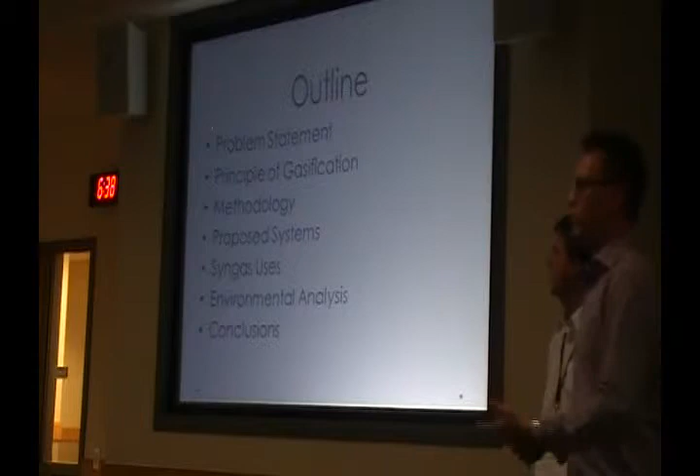What we're going to be discussing today: we're going to go over the problem statement, principles of gasification, the methodology that we used for the analysis, proposed systems for gasification that we analyzed for this project, the uses that we found for SynGas (that's synthesis gas, which is a result of gasification), an environmental analysis, and finally conclusions.

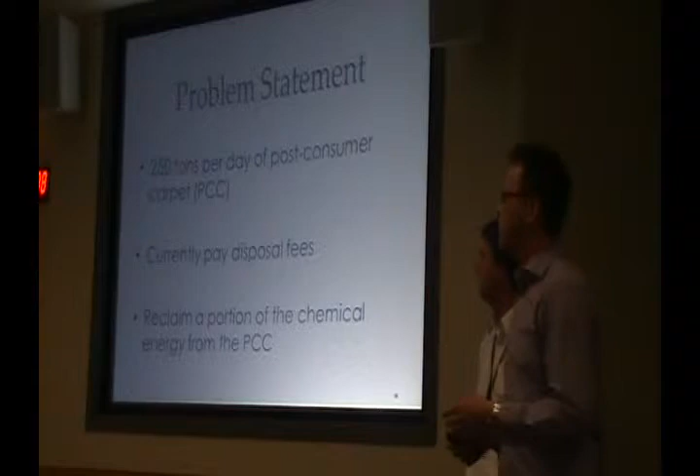So the problem statement is that we have about 250 tons per day of post-consumer carpet waste. Currently, disposal fees have to be paid for this. So we would like to reclaim a portion of the chemical energy that is contained in this carpet.

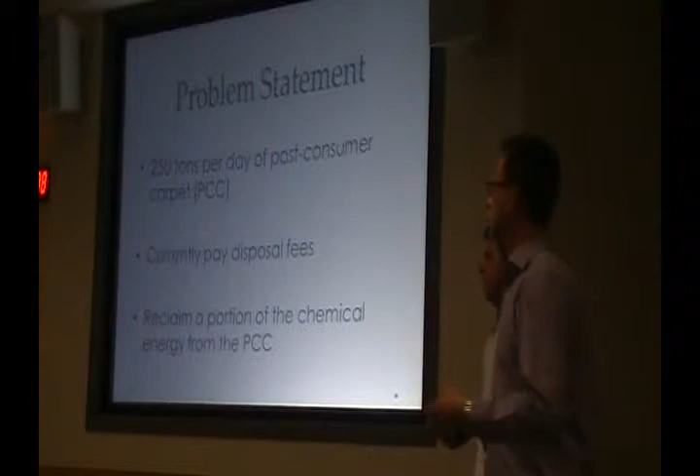Post-consumer carpet has a lower heating value of around 9,000 BTUs per pound. To put that into perspective, middle grade coal has a lower heating value of around 11,000 and natural gas around 20,000. The gasification process of post-consumer carpet will produce syngas with a lower heating value of anywhere from 8,000 to 12,000 BTUs per pound. So the heating value for the syngas would be higher than that for just combusting the carpet to produce steam.

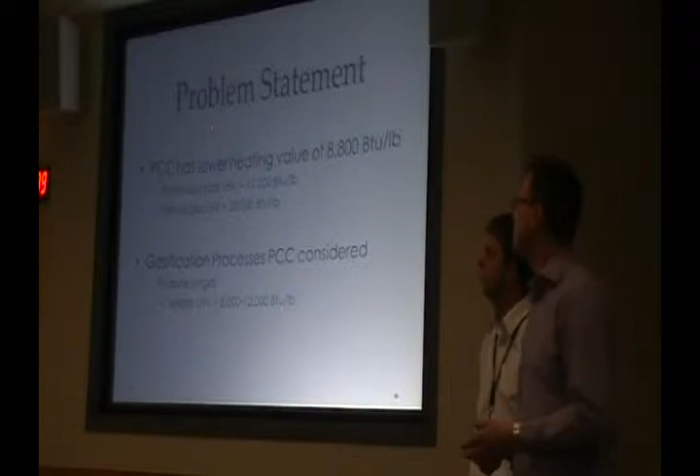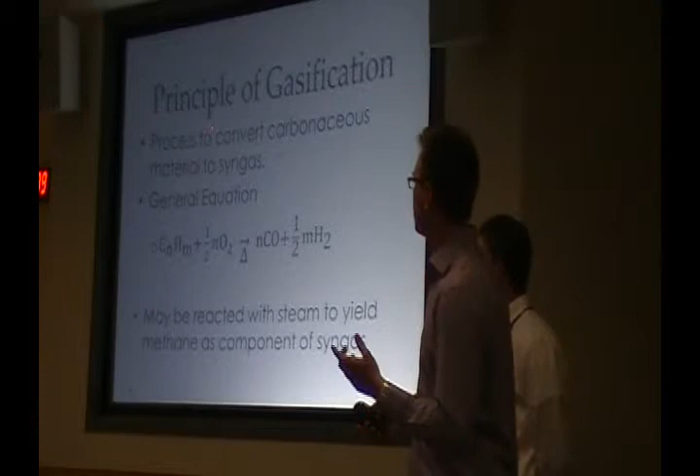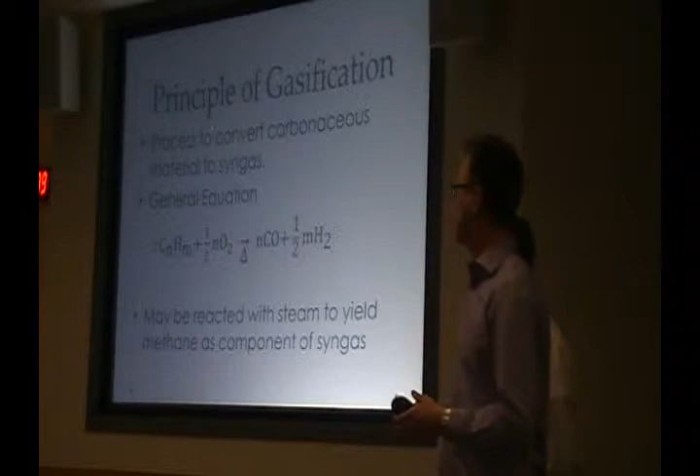The principle of gasification is just a process to convert carbonaceous materials into synthesis gas. The general equation here is that the carbonaceous material is reacted with some stoichiometric amount of oxygen to produce carbon monoxide and hydrogen, which are the main components of synthesis gas. You can also react it with steam, which will yield methane as part of the synthesis gas.

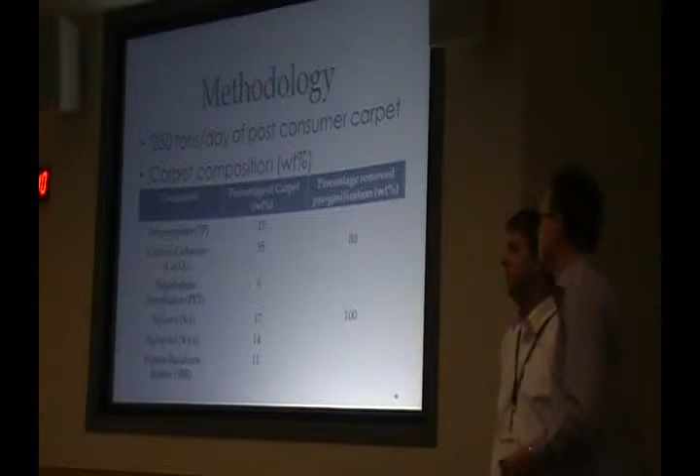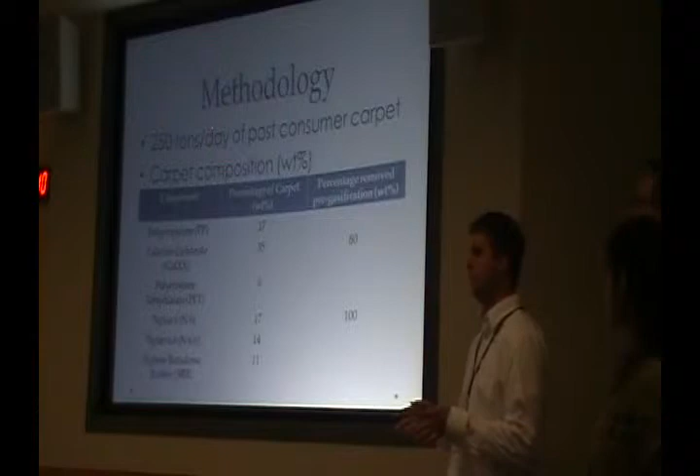As Jordan said, we have 250 tons of PCC available to us, and we use that as our basis. Basically what we decided to do is split that into two separate streams, so we're going to take 125 tons per day and put it into two gasifiers.

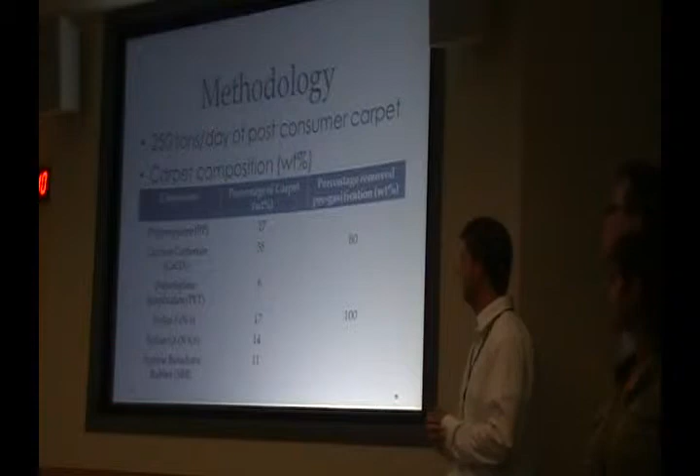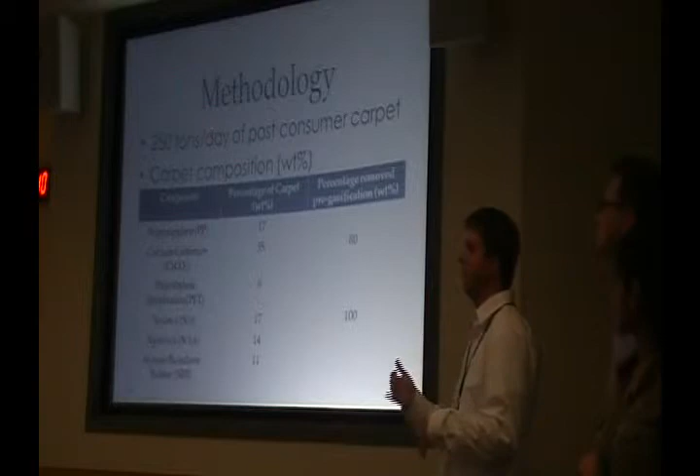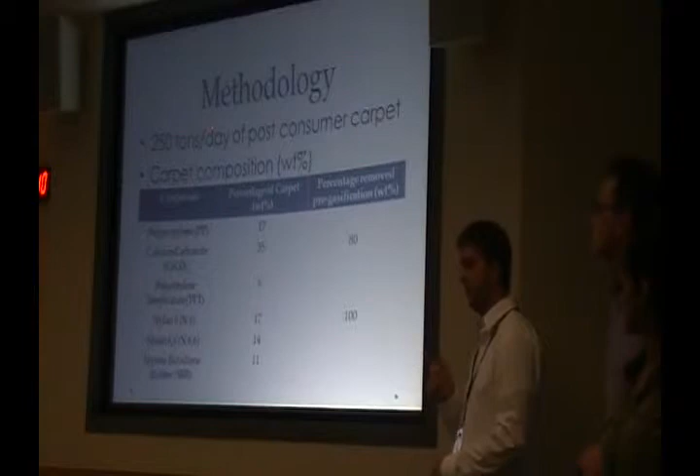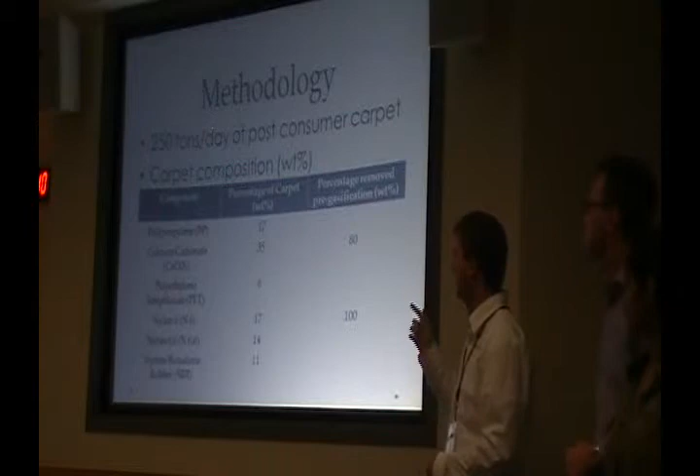From someone who works in the carpet industry, we were able to obtain this carpet composition, broken down into weight percentages of the carpet that they work with every day. It contains 17% polypropylene, 35% calcium carbonate, from which 80% of that 35% is removed by some mechanical method before it enters the gasification. We have 6% polyethylene terephthalate, 17% nylon 6, 14% nylon 6,6, and 11% styrene butadiene. We also removed 100% of the nylon 6.

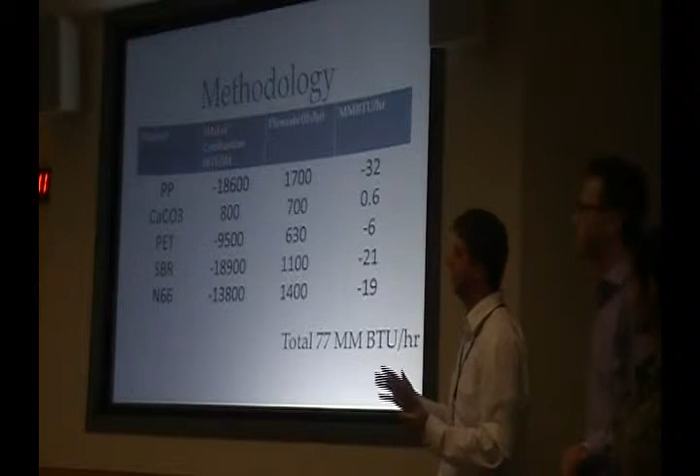We also wanted to get an idea of how much energy we could get out from this process. Basically what we did: we took the heat of combustion for each of the materials available in the PCC, multiplied it by the flow rate for each of the gasifiers to get a total energy output in million BTUs per hour. What we came up with was 77 million BTUs per hour theoretical energy yield.

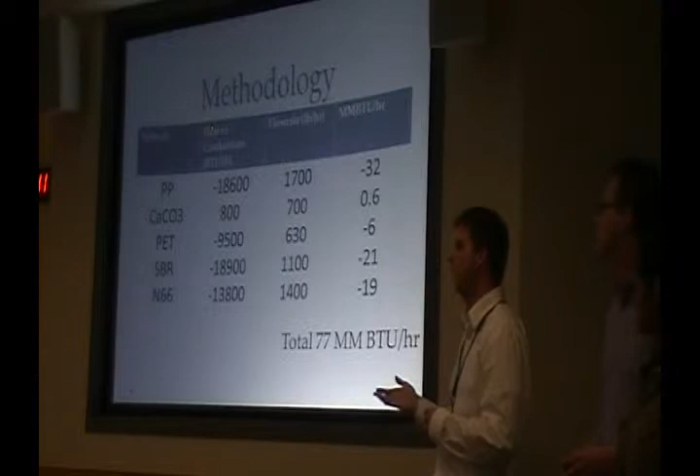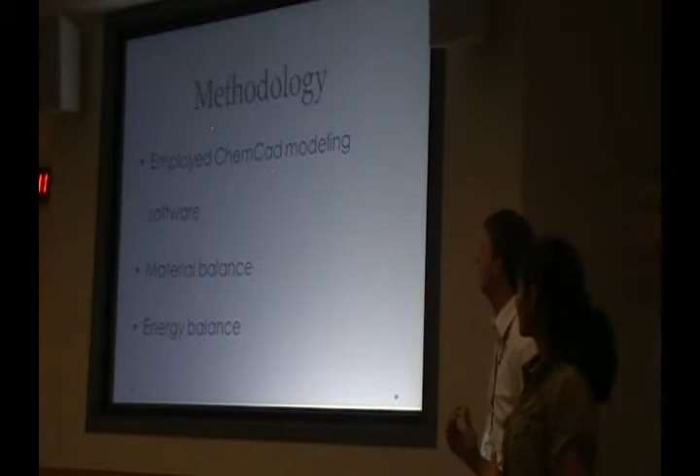For our calculations, we used this ChemCad modeling program. We modeled the gasification process through this program, which helped us to get the material balance and the energy balance.

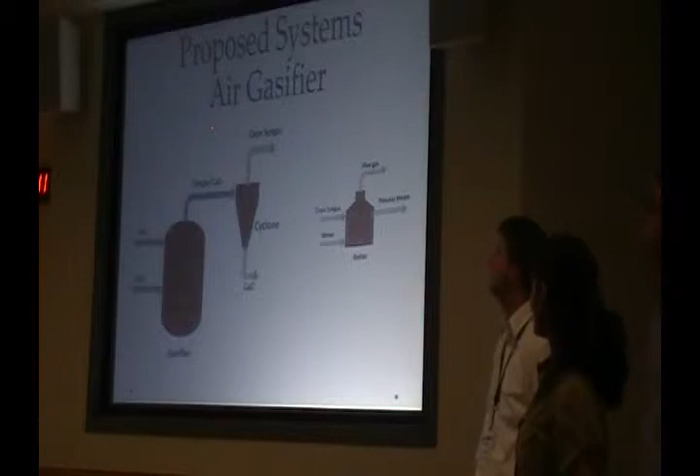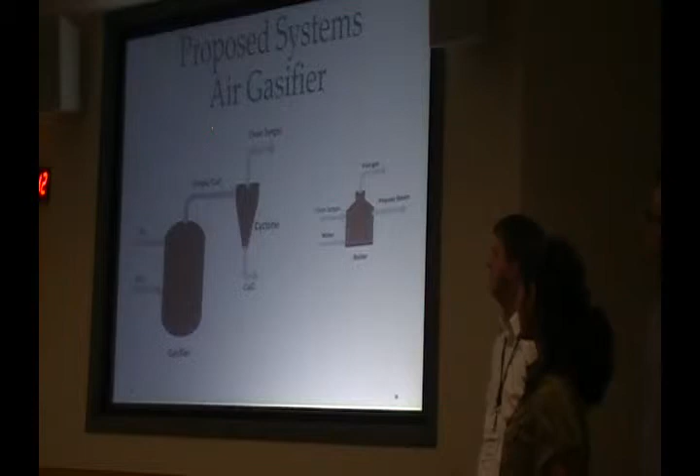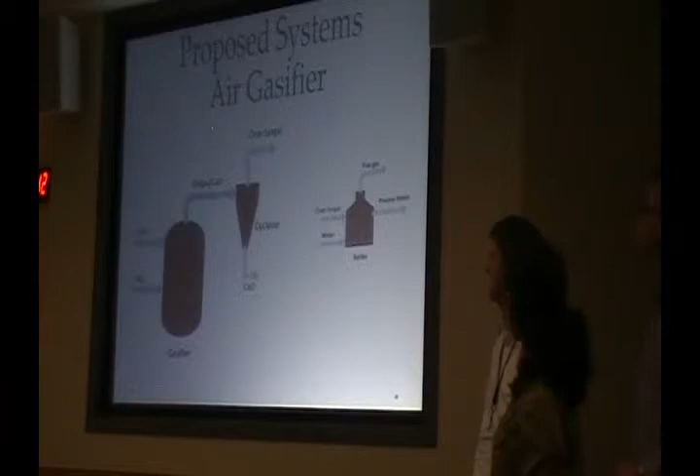Our first proposed system was the air gasifier. The air and the post-consumer carpet go into the gasifier, and the products that come out are the SynGas and calcium oxide, which goes to the cyclone and separates the clean synthesis gas and the calcium oxide. The clean synthesis gas we use to get steam to the boiler.

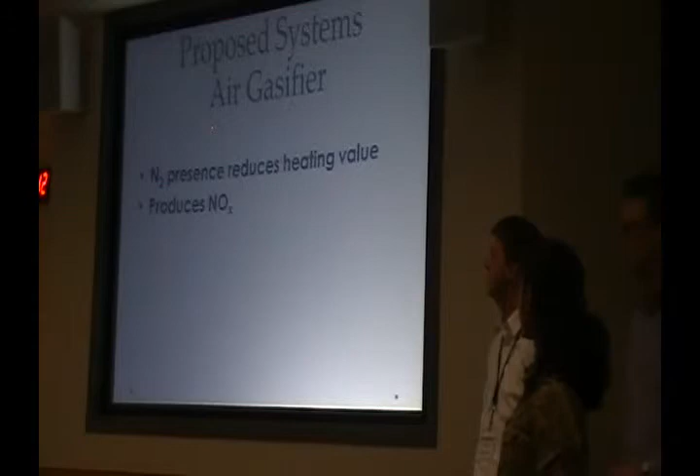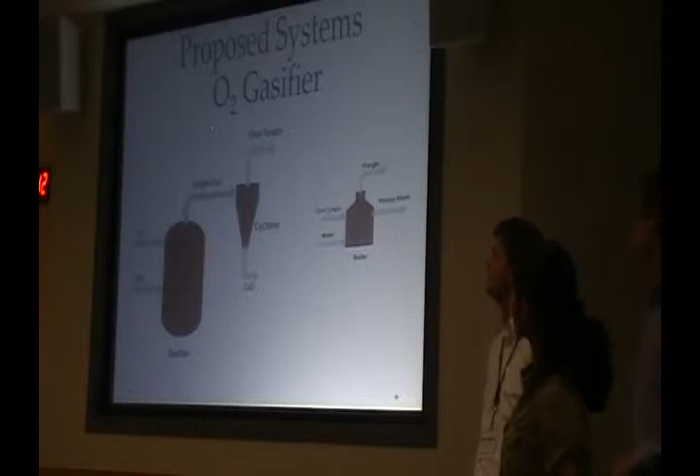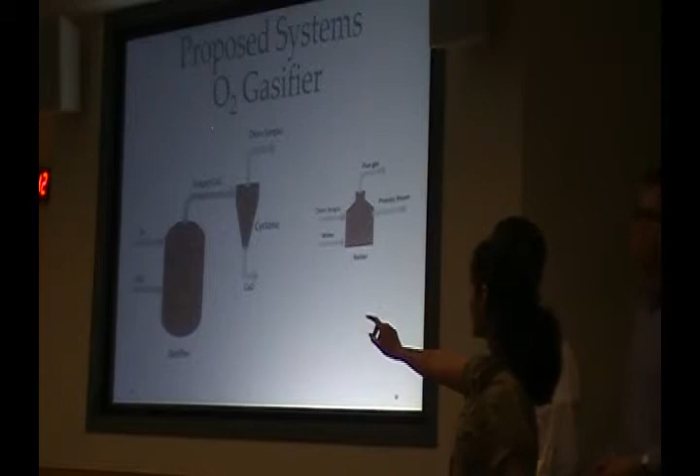In the air gasifier, nitrogen is present, which reduces the heating value and produces nitrogen oxide. The oxygen gasifier is the same as the air gasifier, but the difference is that we use an air separator to separate oxygen from nitrogen instead of feeding air directly in. Everything else is basically the same.

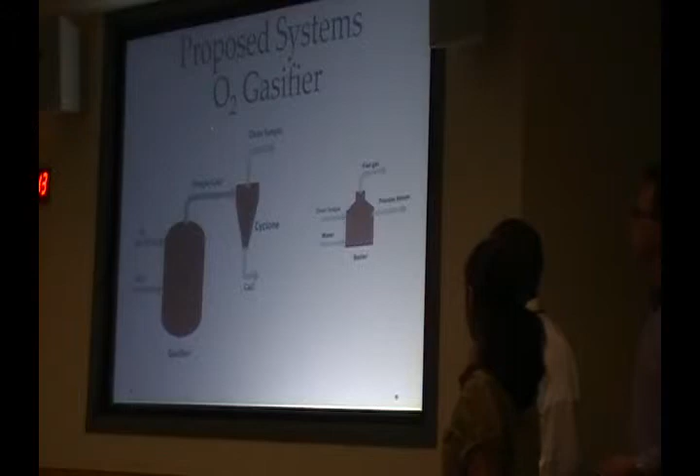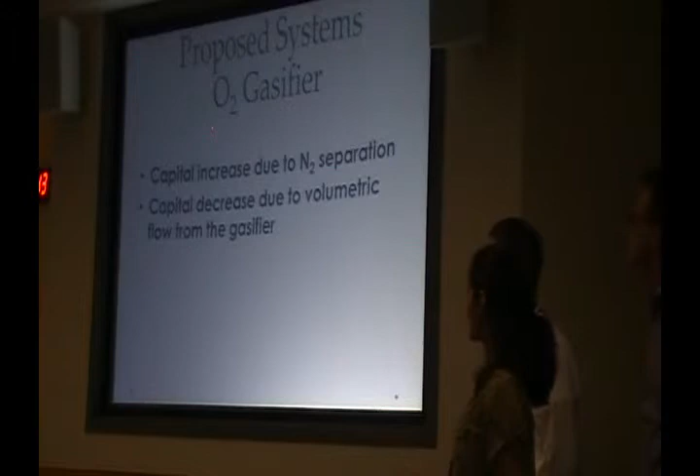In the oxygen gasifier, capital increases due to nitrogen separation because we need to use an air separator to separate oxygen and nitrogen. Capital decreases due to the volumetric flow rate of the gasifier.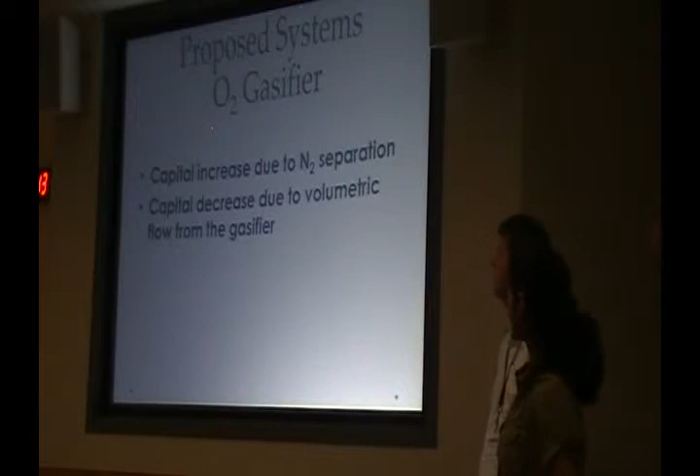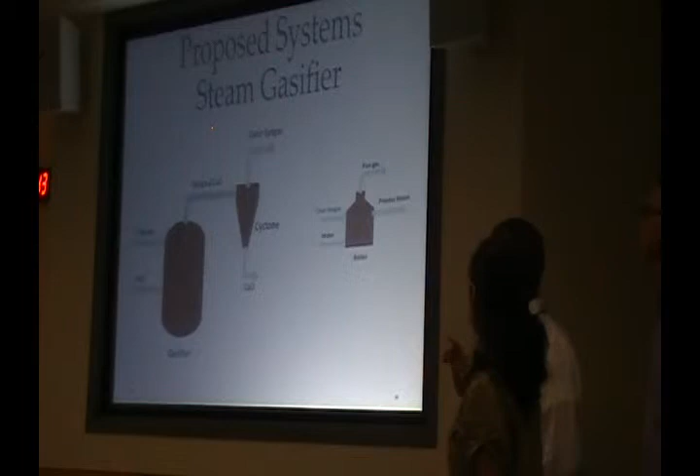This is also very similar to the air and oxygen gasifier, but in this one we will get methane too, along with the SynGas and calcium oxide. We also use a cyclone over here, and the same as a boiler, to get steam out of it.

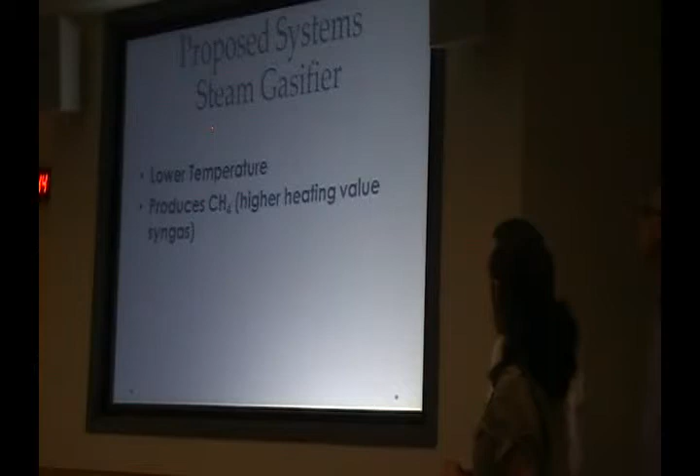The steam gasifier lowers the temperature and produces methane, giving a higher heating value synthesis gas.

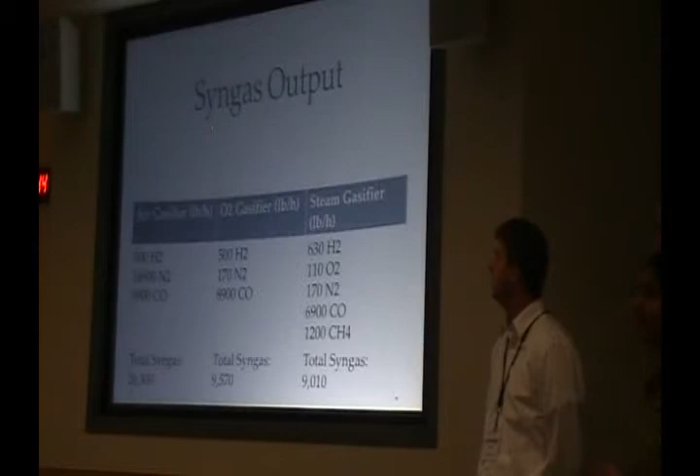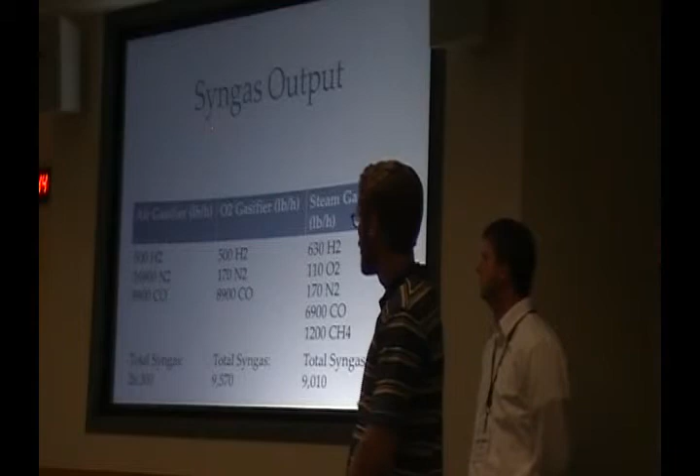For the synthesis gas from each gasifier: the air gasifier produces hydrogen and carbon monoxide as the combustible materials, with a large portion of nitrogen coming in with the air, which helps moderate the temperature but also dilutes the combustible gases.

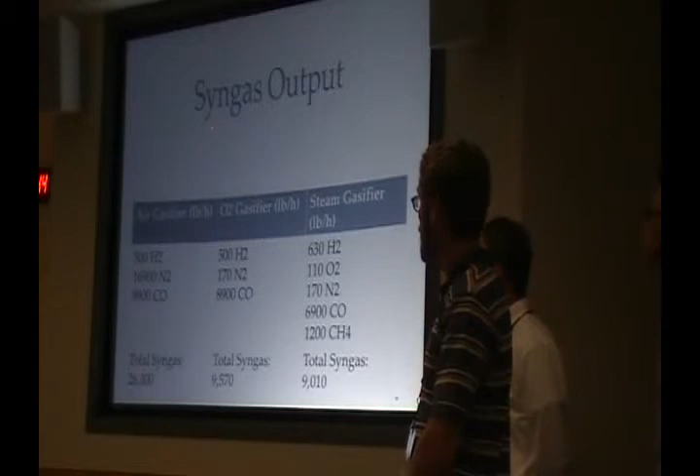In the oxygen gasifier, nitrogen isn't present because it's separated out, and we feed pure oxygen instead. So the temperature is a lot higher, but it produces more condensed combustible materials.

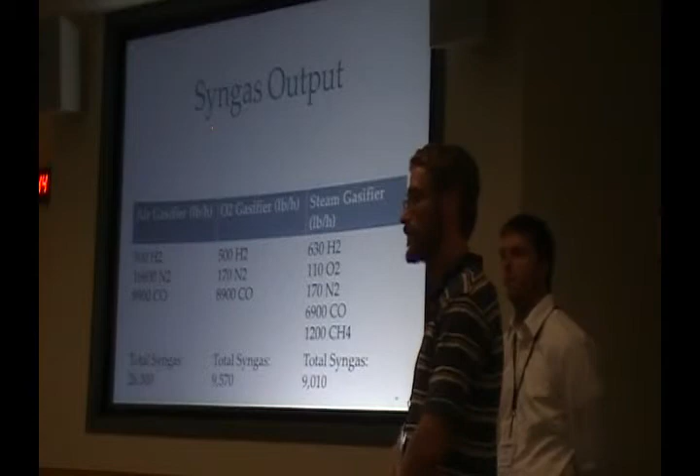The steam gasifier also has no nitrogen present, but it does have methane, which raises the heating value and makes it more suitable for use in a gas turbine.

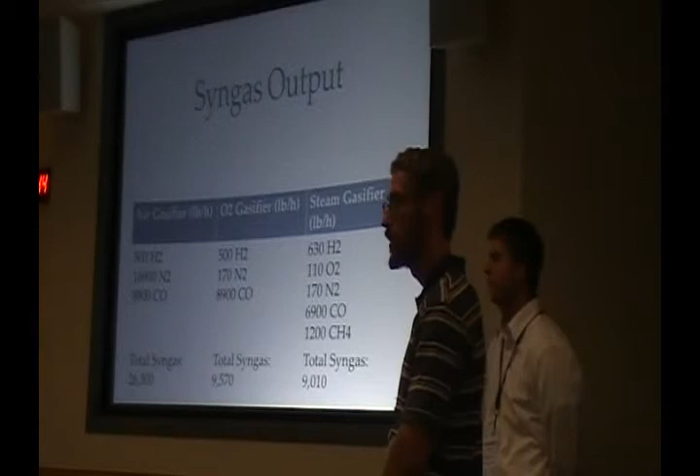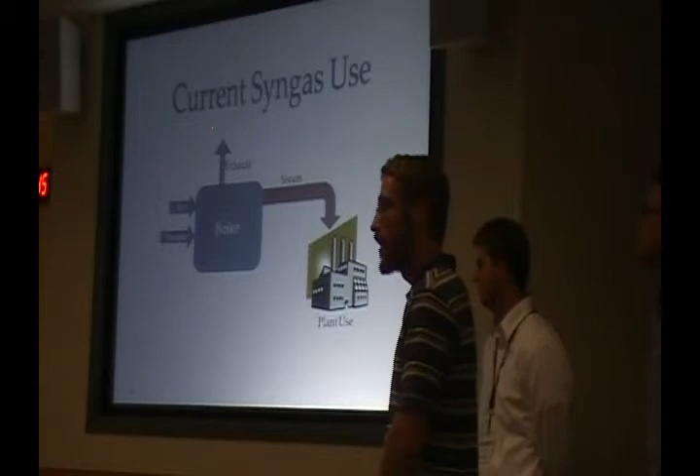For current SynGas use, air and SynGas can be combined in a boiler to produce steam for use in a plant. Another potential use is combusting air and SynGas in a boiler to produce high pressure steam to spin a steam turbine to produce electricity.

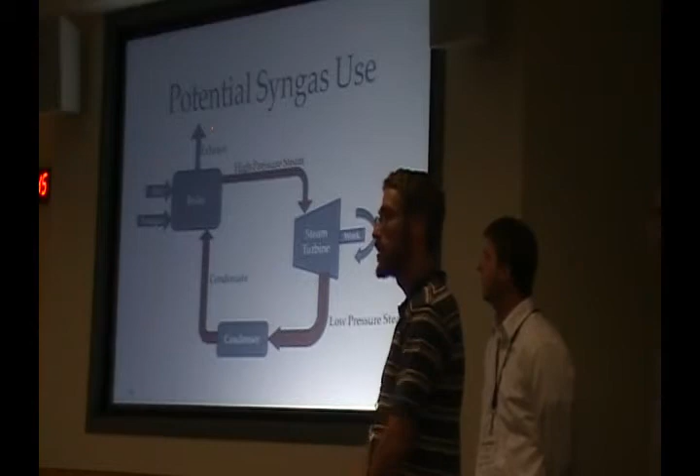Then the low pressure steam can either be used for plant use or condensed back down for circulation. The most efficient use of SynGas would be combusting air and SynGas in a gas turbine to produce electricity.

Then the hot exhaust energy is recovered in a boiler to produce high pressure steam for use in a steam turbine to produce more electricity.

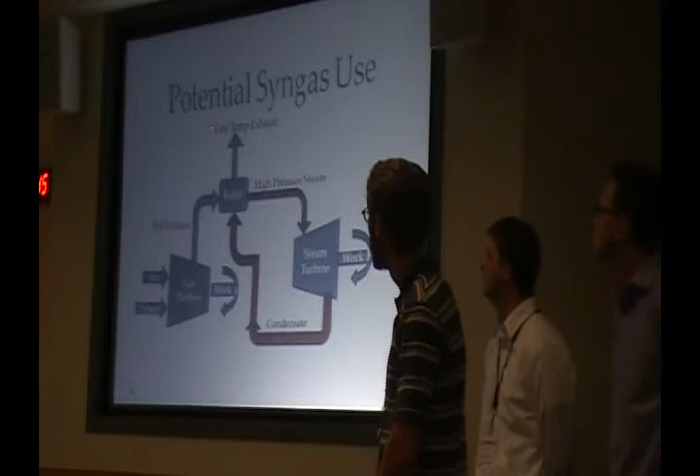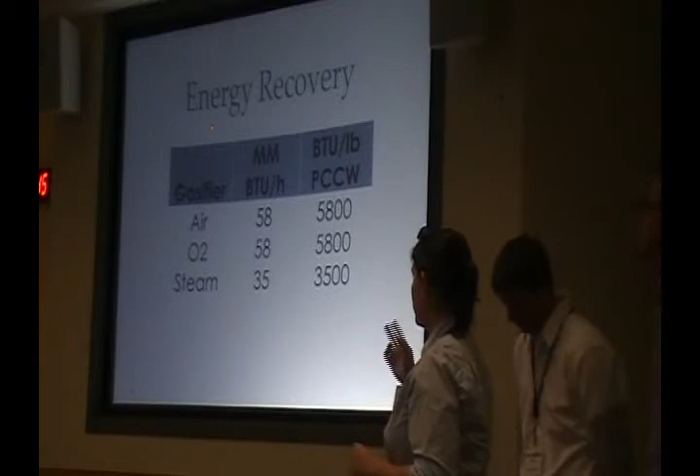To assess the environmental performance of these gasifiers, we looked at both energy recovery and primary pollutants. For the air gasifier and also the oxygen gasifier, we approximate about 58 million BTU per hour, based on the 77 million BTU per hour potential of the incoming stream. That averages about 5,800 BTU per pound of our post-consumer carpet waste.

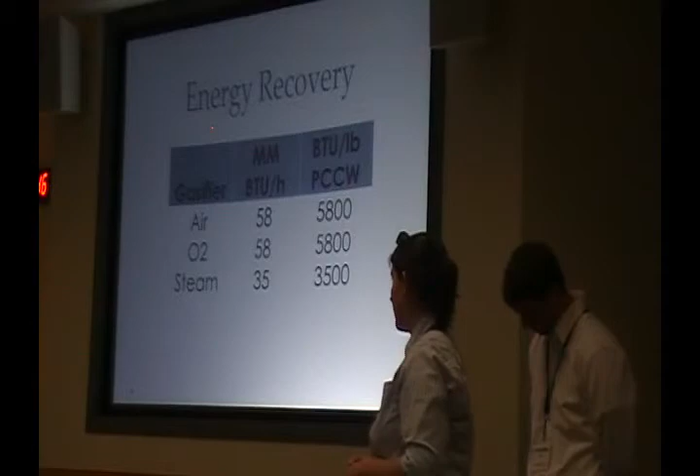For the steam gasification, we approximate about 35 million BTU per hour, about 3,500 BTU per pound of post-consumer carpet waste.

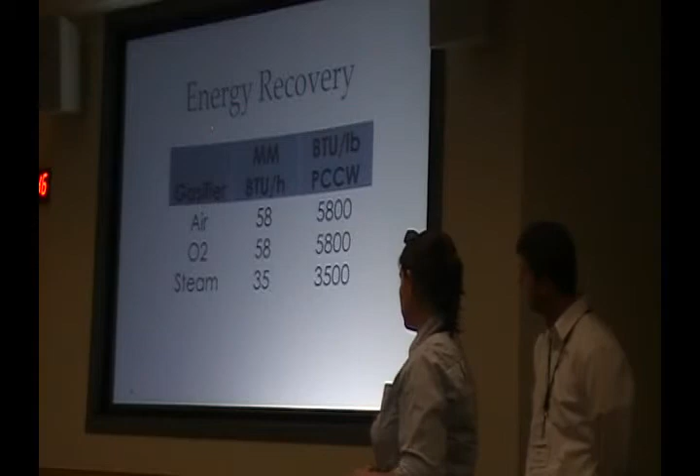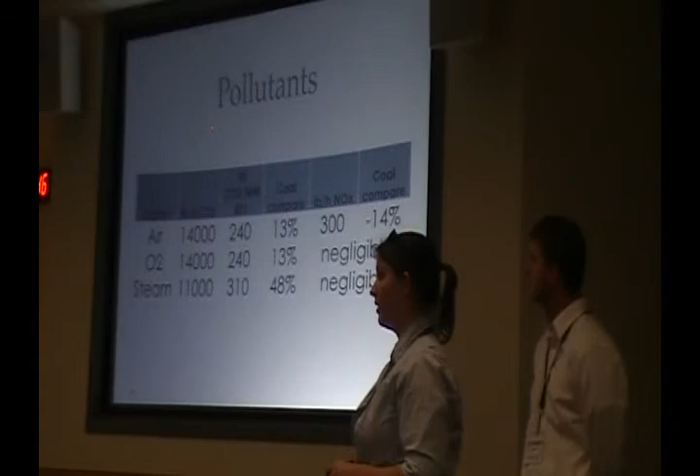For primary pollutants, we looked at carbon dioxide, a greenhouse gas that contributes to global warming. We approximate about 14,000 pounds per hour of carbon dioxide, based on a basis of 240 pounds of CO2 per million BTU recovered. Compared to coal, that's 13% higher carbon dioxide emissions per BTU.

That's the same for the oxygen and air gasifiers. For steam gasification, it was a little less, just 11,000 pounds per hour of carbon dioxide, which is 48% higher emissions than coal.

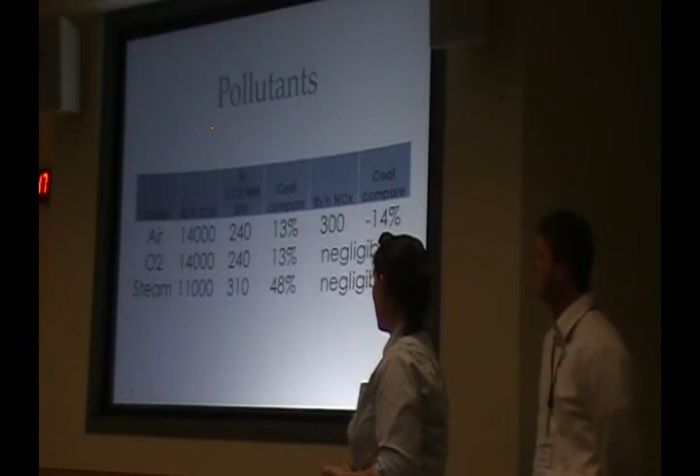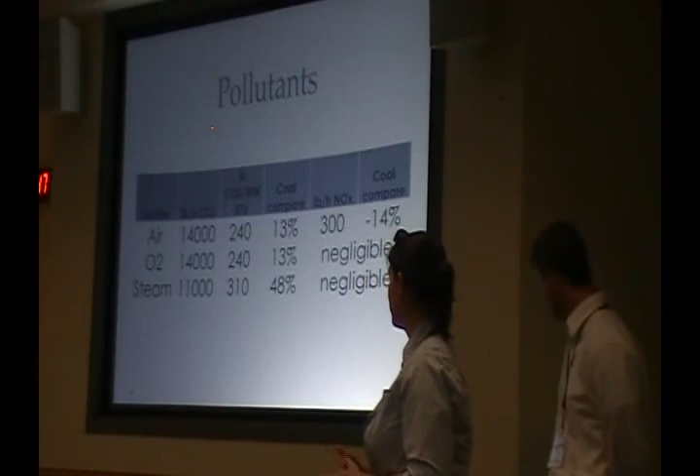For the air gasifier, we also had to deal with nitrogen oxides. Those are negligible for the oxygen and steam gasifiers because there is very little, if any, nitrogen in them. But for air gasification, we had about 300 pounds per hour of nitrogen oxides, which is 14% less than coal.

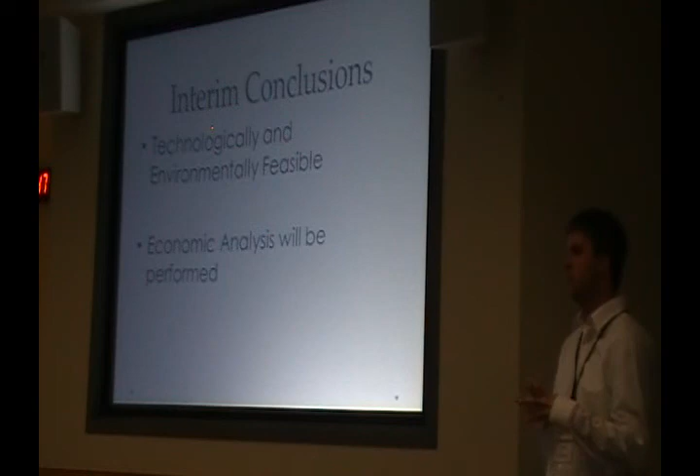In conclusion, carpet gasification is technologically and environmentally feasible. We're currently working on the economic analysis, and we understand it's going to play a major role in the overall decision to use one of these processes. It will be available in our final report.